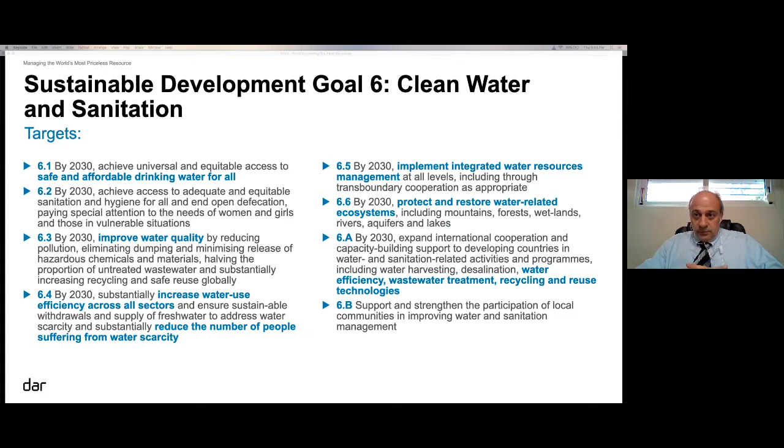Karim, we're starting with you today. So the first target under SDG 6 is providing universal access to safe and affordable drinking water. One of the most critical resources for this goal is groundwater. Tell us a bit about this resource. Why is it so significant, and what are the challenges associated with managing it?

Thank you, Haya. Yes, indeed. As you probably already know, 70% of the surface of the Earth is covered with water. However, most of that water is salt water in the ocean, so that's not usable. In fact, only 2.5% of all water on Earth is fresh water. And from that, about 70% is also frozen in glaciers and ice caps, so it's not immediately usable for communities. This leaves us with groundwater, which constitutes about 30% of all fresh water on Earth, which might not sound like a lot, but it actually serves as the primary freshwater source for upwards of 2 billion people.

So that's why for us as engineers, it's very important to appreciate our role in managing this resource sustainably. For that, there are two main challenges. The first relates to the quantity of the water: the idea is to extract enough water to meet the required demands while not depleting these resources and maintaining them as renewable. The other aspect is in terms of quality, where you don't want any contaminants or pollutants from the surface to deteriorate these resources.

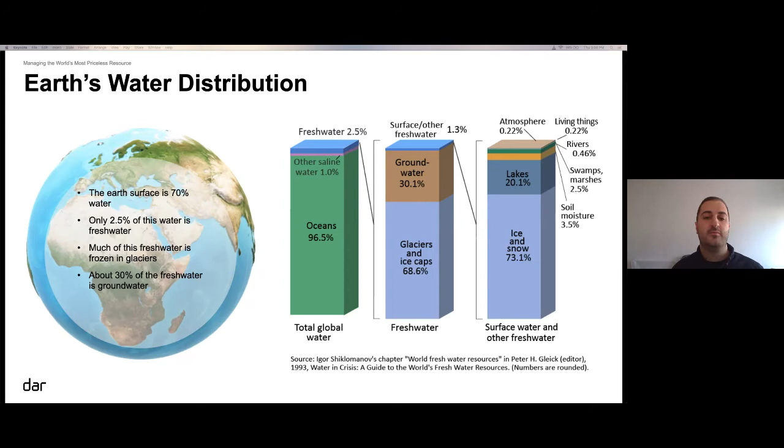This is an exceptionally important problem for us as engineers, particularly in urban areas. For example, if you have excess groundwater abstraction, you might have a dangerous phenomenon known as land subsidence, which is essentially when the surface of the soil settles due to removing too much water from under it. That can lead to flooding, and that can obviously lead to devastating consequences on underground structures and infrastructure, costing up to hundreds of millions of dollars.

On the other hand, some other cities, particularly new cities, can have the opposite problem. Instead of a fall in groundwater levels, you could have a rapid rise in groundwater levels, due to excessive recharge from the surface, which can be due to leakage from utilities, excessive infiltration from irrigation or landscaping at the surface, and in coastal communities, could be due to the influence of seawater level rise. In this situation, the shallow subsurface becomes saturated with water, which can have a negative impact on any infrastructure located underground.

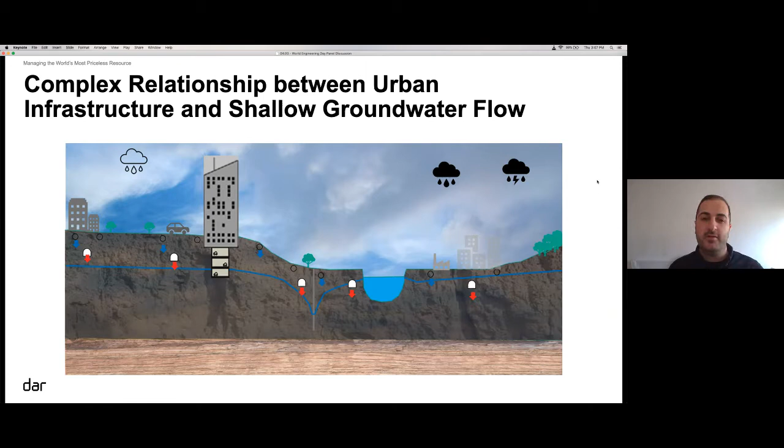So just to illustrate that, I'm going to quickly talk about an example of a city located in the Gulf region. The images on the left show how quickly the city expanded over a period of 30 years. And in recent years, citizens started seeing damage to the roads and infrastructure, and that was all due to the shallow groundwater table.

Even though at the time of construction it wasn't necessarily very shallow, this recharge had an impact on the infrastructure. So our objective here was to design a system to control the water and maintain it at an acceptable level, while at the same time maintaining the city services in operation.

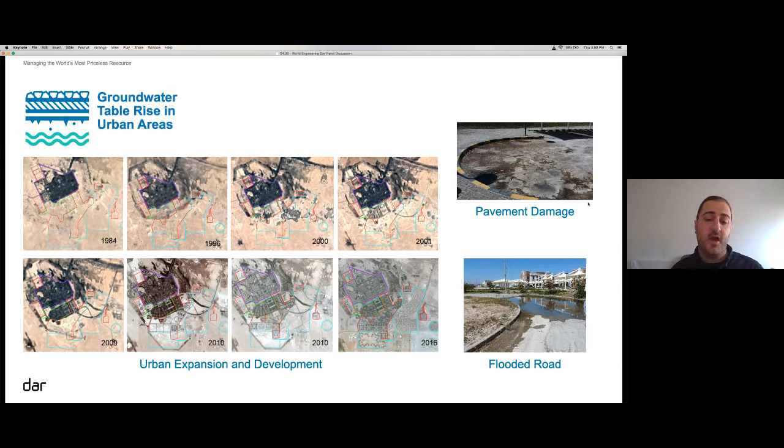So in order for us as engineers to come up with the optimal solution, what we need most is data, and not just general data. What we need is local, site-specific data that we can import into a groundwater flow model or numerical model. This data is used to calibrate the model to mimic the actual conditions on site, and then we can make projections.

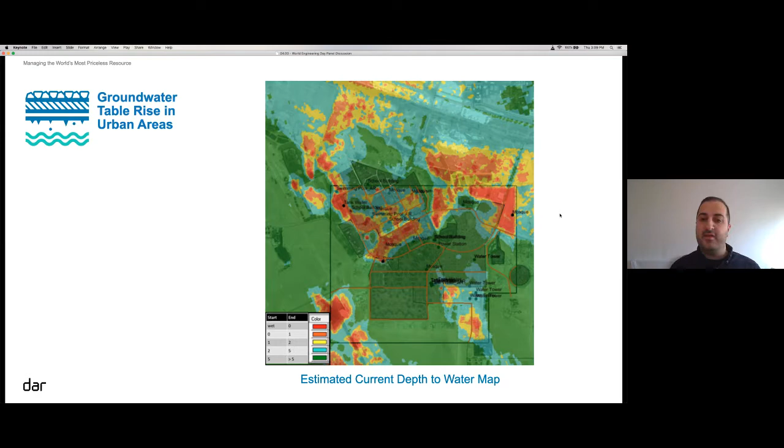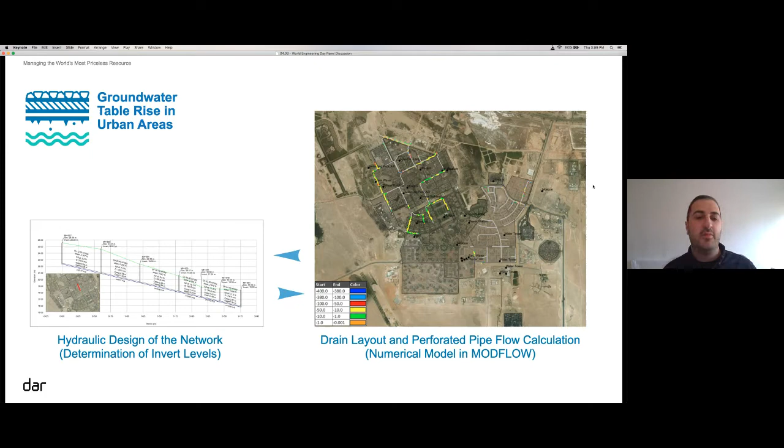So having identified these critical areas, our solution for this problem was to implement a subsurface drainage system. That is essentially a network of perforated pipes placed under the roads that collect the water and effectively lower the water table to acceptable levels, while not really disturbing what's happening at the surface.

The next slide shows just quickly the results of this simulation. After implementing the subsurface drainage system, as you can see, the critical residential areas have had their groundwater lowered.

So having said all this, the question that remains is, what do we do with all this water? You might think that this water extracted from these systems is not significant or doesn't have good enough quality. However, in our experience, we've come to believe that every drop of water that can be used should be used, particularly in cities that have high water demand.

So the idea here, to improve the sustainability of the city, is that this water, which was found to have good enough quality and a large enough volume, will be used for landscaping and other municipal uses across the city. So it was important to us to turn that problem into a benefit.

Excellent. So you protect the infrastructure and you also are able to reuse the water sustainably.

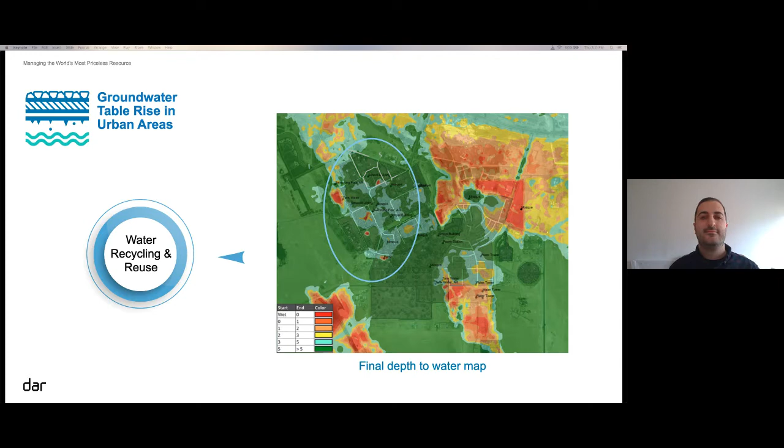Yes, exactly. Karim, another important aspect of SDG 6 is to make sure communities have access to the drinking water resources they need. You also mentioned you were working in very dry regions, and this is very important in such areas because they suffer a lot from water stress. Sometimes to deliver water to such communities, you as an engineer need to try unconventional approaches. So when we began preparing for this panel, you mentioned one project in particular that was quite ambitious. Describe this project for us.

Yes, indeed. This project is what is known as an aquifer storage and recovery system, which, as the name implies, is a system for storing water essentially underground and then retrieving it whenever it is needed.

So for this project, excess desalinated water from city operations was introduced into an aquifer located essentially in the middle of the desert, a few kilometers away from the city.

And the idea or the challenge for us here was to design an optimum operation scheme between infiltration and recovery, in order to ensure that the water introduced into the aquifer is not lost into its depths, and at the same time, whenever needed, it can be retrieved easily from the recovery wells constructed in the aquifer and pumped directly back to the city.

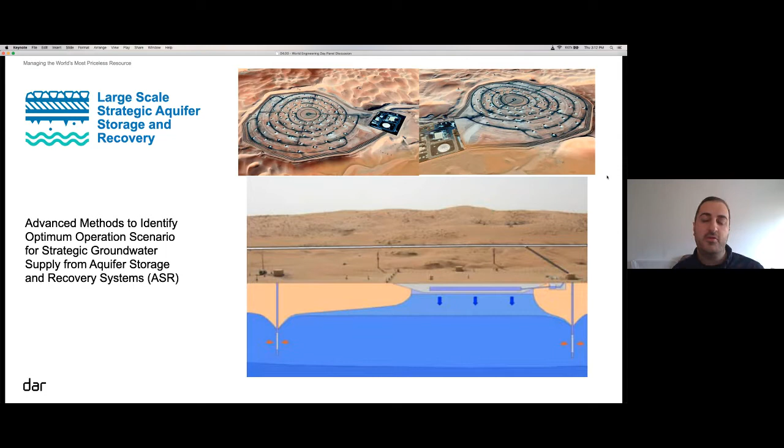So again, what we needed the most to simulate this model and come up with the optimal solution was data, local data. On the next slide, you can see some examples of the data that was collected. We were lucky to have a lot of data for this project.

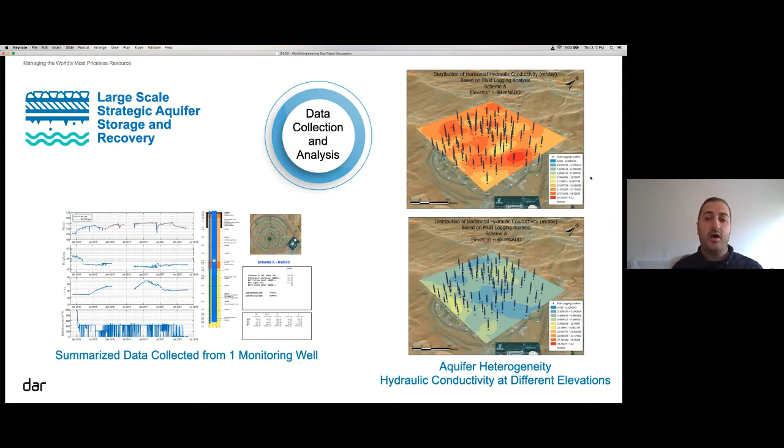All of this data was introduced into a groundwater flow model. Especially the problem here was particularly complex because not only do you have to model the flow of water, but you also have to model the interaction between the fresh water that is introduced and the salt water that is already in the aquifer.

So from the creation of this model, we can create a number of forecast scenarios that tell us what would happen under different recharge scenarios, different infiltration scenarios.

So this was just one example of how us as engineers have a responsibility, or a big role, in promoting the resilience of cities and promoting the sustainability of cities and their readiness in the face of emergencies.

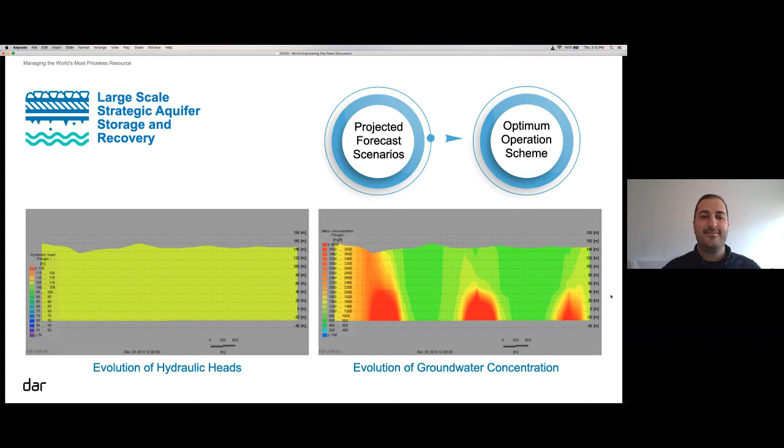Okay, so as Karim has demonstrated, managing groundwater is essential in empowering communities to meet their water needs. But just as important is what happens on the surface.

So our next speaker, Mr. Scott Smith, is an expert in water resource management, especially as related to water efficiency, water harvesting, and recycling and reuse technologies. Scott, you work on both small-scale projects, such as buildings, and also on master plans for entire cities and developments, sometimes within very specific restrictions and regulations. So tell us about your experience.

Thank you, Haya. Yes, if you could go to the next slide, please.

All projects need an understanding of the water, sewage, and stormwater constraints for projects and sites in the Middle East and worldwide. In my opinion, the main engineering challenges we face in terms of water and sanitation is to establish water budgets for our projects and master plans, that is potable water, gray water, treated sewage effluent, and sewage. We need to understand these inputs and outflows to better create the design.

The determination of the amount of available water from all sources coming into and out of the project boundaries is key to a good design. This ensures that designers understand the water limitations and needs of the site and adjust their designs accordingly. It also assures that water efficiency measures, like low flow toilets, water efficient fittings, water efficient irrigation, gray water systems, etc., that are put in place are justified and relevant to the design.

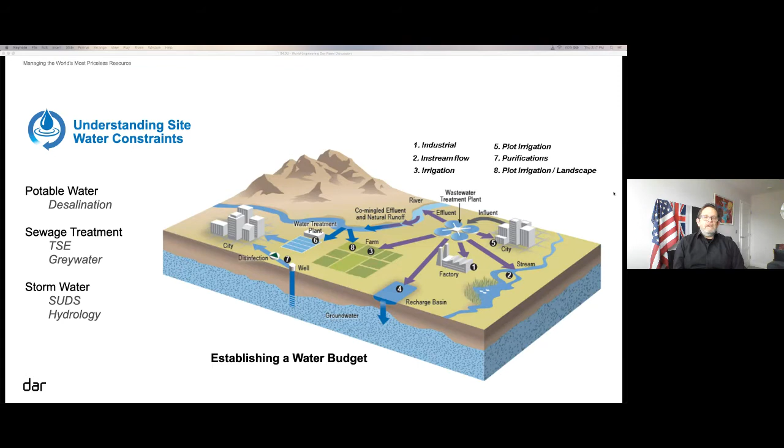Looking closer at the urban site water constraints, potable water and sewage is usually provided by the municipality or utility providers. The problems associated with obtaining the water and treating the sewage are for a kind of others to solve. But unfortunately, as cities mature and become more urbanized, more and more utility providers are imposing constraints and conditions in urban settings on how buildings and projects can connect into their services.

In terms of stormwater constraints, which with climate change and the increased frequency of major storm events in the world, most sustainable urban drainage system solutions will not work based on the space constraints in the urban environment and practical issues associated with the site. There is usually no room for swales, wetland features, ponds, etc., with most site area covered in hardscape and impervious areas, which makes storm events and handling the rainwater more important.

Therefore, for the determination of urban water budgets, this requires establishing design principles around how to connect into services, inputs and outputs, which lead to gray water and rainwater harvesting and stormwater management solutions. Next slide, Haya.

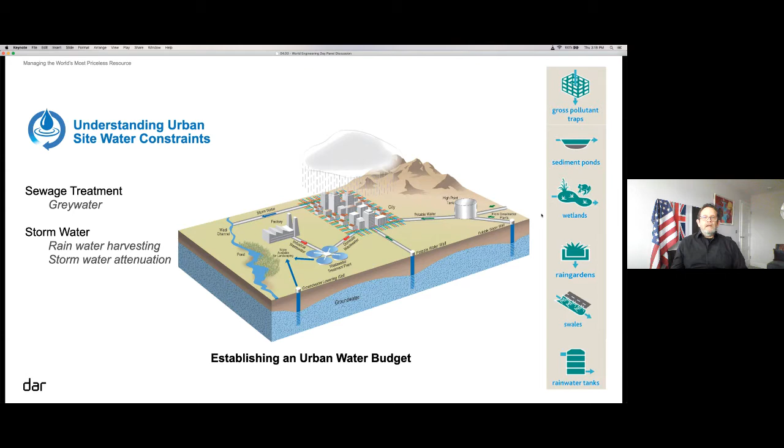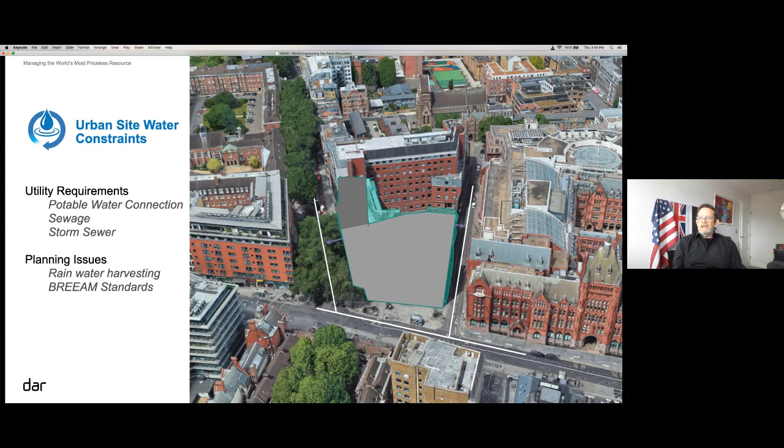This is our new building, the Dar Group new headquarters in London at 150 Holborn, which is currently under construction. In established urban sites like 150 Holborn, water utilities set the typical size of water connections and meter constraints for the total amount of potable water that can be provided to the site.

Sewage outflow needs to be established without exceeding the amount already connected from the existing building. For 150 Holborn, the utility company mandated that the stormwater peak outflow needs to be reduced below 50% of the expected 1 in 100 year storm event from the previous building on the site,

if we're going to connect rainwater into their sewer system. In addition, the planning authority, under whose control this building falls, required that the design provide rainwater and greywater harvesting systems, and that 60% of the available credits in the UK Sustainable Certification, BREEAM, which is a requirement for planning, need to be achieved before construction takes place.

So we had to show in our design that we would be meeting 60% of the water credits on the sustainable certification. The sustainability group in London, which I am a part of, made great efforts to ensure that water efficiency is at the heart of our new European headquarters building in London. We ensured that the constraints in terms of reduction in potable water consumption, sewage outflow, and stormwater attenuation imposed by the site and local utility providers are met through a combined greywater rainwater harvesting system that works in combination with the building's stormwater attenuation system.

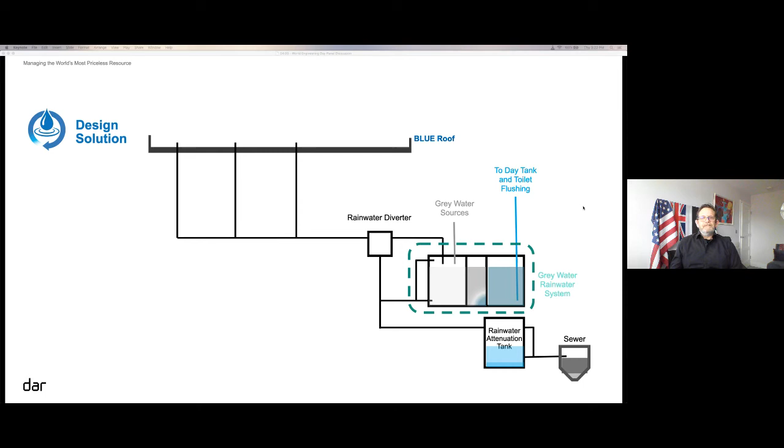In the UK, if the Met Office issues a flood warning or weather alert for the London area, the smart building technology detects this alert and configures the building to be prepared for the event. This is done by opening the valves in the intake tank on the greywater rainwater harvesting system and the rainwater attenuation tank to ensure that they are both empty.

The rainwater diverter valve is then set to allow rainwater to empty into the rainwater greywater harvesting tank. In the first instance, the blue roof is allowed to fill up, capturing the first 50 millimeters, or 2 inches, of rainwater, which then slowly drains from the roof at an established rate at the gullies.

If more rain falls that exceeds the 50 millimeter level over the time the roof is allowed to drain, this rainwater overflows into the rainwater downpipes and into the building's rainwater system. In turn, the rainwater and greywater harvesting tank is then filled.

Once the rainwater greywater harvesting tank reaches capacity, the rainwater diverter valve switches to allow rainwater to fill the rainwater attenuation tank. If the rain event exceeds all this capacity, it is then allowed to discharge into the sewer. This system is designed to store over 50% of the rainwater precipitating onto the site in a 100-year storm event, based on the existing building that was previously on the site.

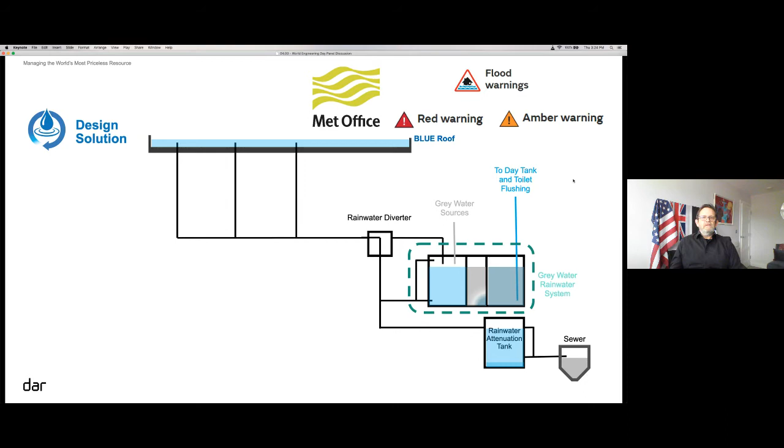Next slide, please. This building, designed and installed into our new building, has allowed the design aspects of the building to meet the highest sustainable certification standards of LEED Platinum and BREEAM Outstanding, which are the highest certification levels we can achieve.

This also allowed us to achieve all the water credits for both certification systems. For LEED, we got 11 out of 11 credits, and for BREEAM, we got 9 out of 9 water credits. Next slide.

This same problem can apply to other urban areas of the world, and in the Middle East due to climate change impacts. Obviously, other cities besides London will have differing levels and complexities associated with water and sanitation, and may not need to utilize the engineering solutions we have put in place for 150 Holborn.

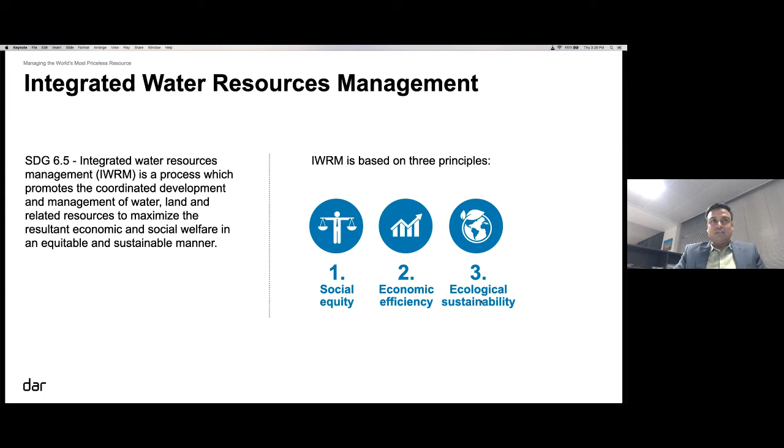Haya, can you please go to the next slide? So what are the challenges we face in integrated water resources management, planning, and design? Mostly we face four challenges.

The first one is unavailability of topographical information or ground information. This information is required to develop the understanding of contributing catchments in a particular region to estimate discharges.

The second is historical rainfall data. This is used to get information about rainfall patterns in the region and to estimate the water storage volume in the area.

The third one is existing groundwater levels. Generally, we don't get this information in developing countries. If we can get it, it provides the condition of water exploitation, how much water has been exploited. In case the water is at shallower depth, as mentioned by Karim, in urban cities we need to know this information to design the concrete structures.

And the fourth one is gauged river discharges. This information provides valuable data about historical flow rates of any river or catchment, and also provides a relation of the flow rate with catchment parameters such as runoff and rainfall.

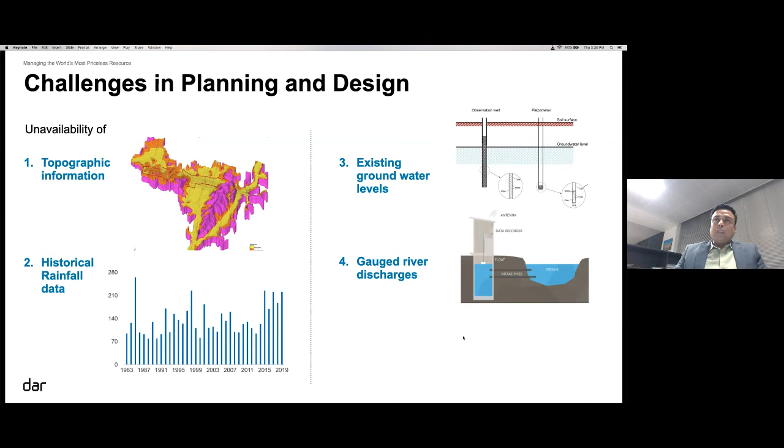So what are the solutions that can be adopted to overcome these challenges? The first challenge we discussed was unavailability of topographical information. In that case, we can explore SRTM data which is available.

What is SRTM data? SRTM data is Shuttle Radar Topographic Mission data that provides a digital elevation model of 30 meter spatial resolution, and it can be used in ArcGIS platform to prepare catchment and stream delineation of an area. It also provides contour levels.

The second challenge we discussed was absence of historical rainfall data. This can be overcome by using TRMM data, which is satellite data. The full form of TRMM is Tropical Rainfall Measuring Mission, and this provides short-term historical rainfall data from year 1998. It provides rainfall data with reasonable accuracy, giving the engineer a general idea about the rainfall pattern in the area of interest.

The third challenge we discussed was about existing groundwater level. In absence of existing groundwater level information, we can visit the site, find out the existing water wells, and measure the water levels in those wells to get information about the current condition of groundwater level.

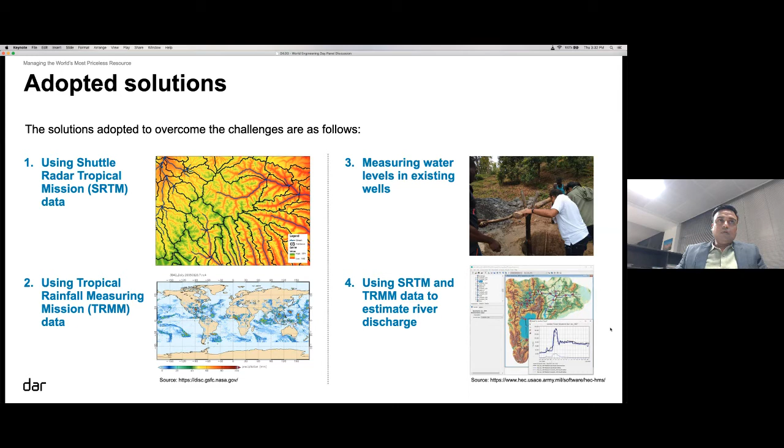These solutions generally we adopt in projects where data is not available.

Now I'm going to present a case study where all the previously mentioned solutions are adopted, whether it is use of SRTM data in absence of topographical information, TRMM data for rainfall pattern, or measurement of groundwater in existing wells. This case study is from an African city where the existing water supply source is only groundwater, and it was overexploited.

In addition, the city has witnessed rapid urbanization over the past two decades, which has aggravated the situation. Due to depletion of the groundwater table, farming in the region has been adversely impacted as the cost of water extraction has risen a lot. In some locations, the wells were running dry and there was no water anymore.

So what happened after that? The city administration decided to improve the current water supply system in the city and selected DAR to propose a suitable solution that could serve three main purposes: first, rehabilitation of the water supply system; second, replenishing the groundwater table; and third, providing adequate irrigation water to the farmlands.

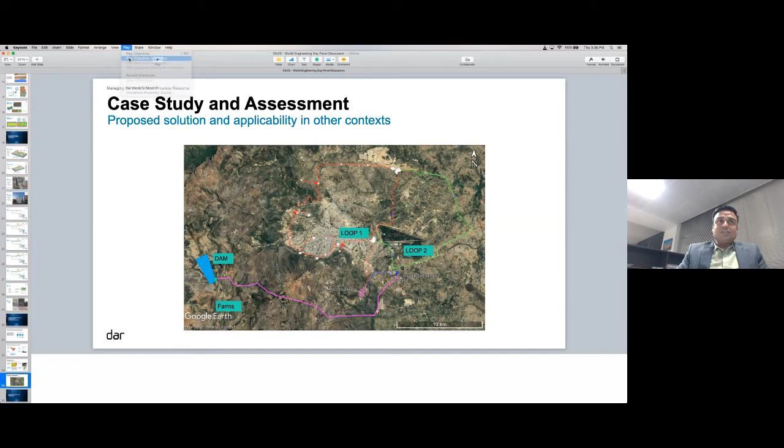So regarding applicability in other developing countries: I believe nowadays developing countries are finding themselves in a state where current water use practices are leading to water deficit and are not able to cope with new challenges such as population growth, rapid urbanization, changes in rainfall pattern due to climate change, and increased water demand in the agriculture and industrial sectors due to rapid growth. We are witnessing this in India quite a lot nowadays.

All these aforementioned issues can be addressed by an integrated water resources management process, which can help developing countries focus more on economic and social growth without compromising the sustainability of the environment. Thank you.

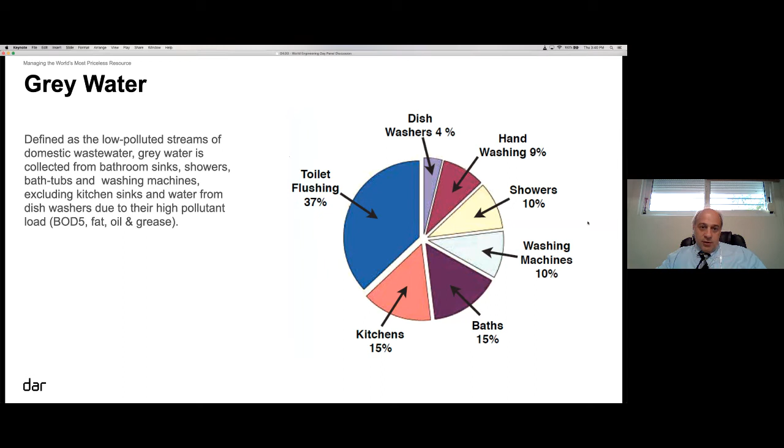As we can see from the process flow diagram, the process includes flocculation, sedimentation, ultrafiltration membranes, known as UF membranes, and the treated water is stored in a balancing tank. From the balancing tank, it's pumped into the building's toilet flushing network and the irrigation network.

The plant produces 150 cubic meters of grey water. The losses of 20 cubic meters per day are due to backwashing of the UF membranes and the waste sludge which is disposed. The treatment of grey water can, as we said, be used for toilet flushing and irrigation purposes, and in this way we can reduce our freshwater demand by at least 40%.

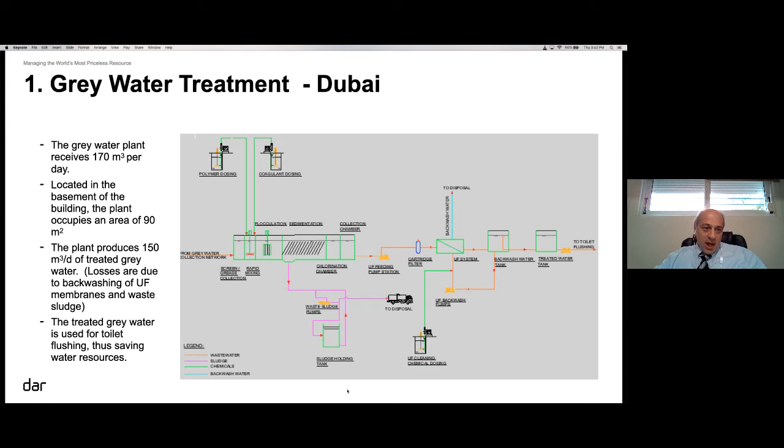The biological treatment includes nitrogen and phosphorus removal, so that at periods of low irrigation demand, the treated wastewater can be safely disposed into the sea.

The waste sludge is anaerobically digested so that we can produce heat and power from the biogas released from the process, which is sufficient to run the digestion process on its own.

Now, the digested sludge is further dewatered and mixed with wood chips to produce compost for agriculture. Therefore, we can see that this plant is a very good example of sustainability, since everything is reused, nothing is wasted or dumped. All the wastewater comes in, is treated and is used for irrigation, and the waste sludge is made into compost and used for agriculture.

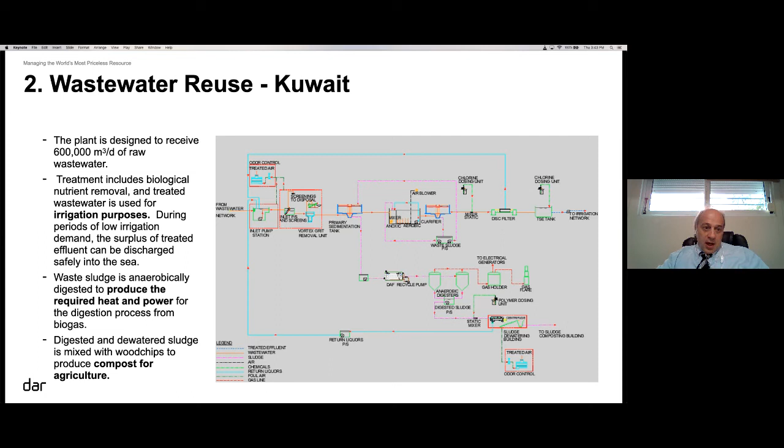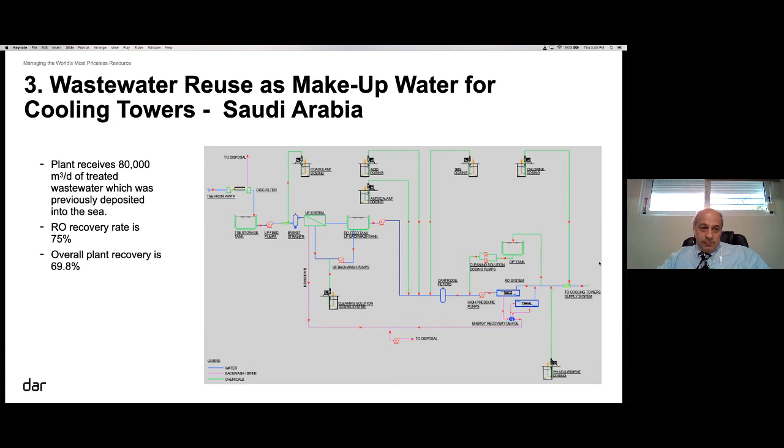The plant produces 60,000 cubic meters of makeup water, which is used in the airport cooling plant. So in this way, we can save 60,000 cubic meters of fresh water.

Now, as we can see from the examples given, different treatment processes have to be used depending on the final use of water, keeping in mind that the ultimate goal is to minimize the potable water demand through environmentally friendly, sustainable solutions. Thank you.

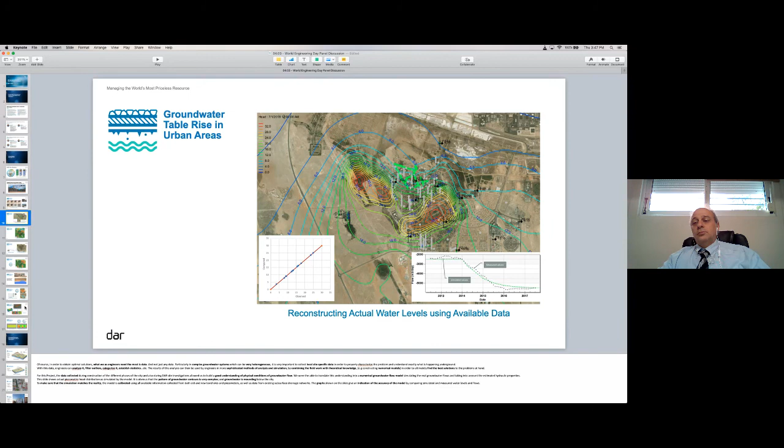Hydrogeological systems or groundwater systems are very complex and very heterogeneous. So as I mentioned earlier, you do need site-specific data because no two systems are the same. You need water levels, you need measurements of hydraulic conductivity measured through pumping tests. You can have a measure of concentration if the issue is fresh water versus salt water. The more data that you have, the better it is.

As Naveen was talking about the importance of data as well, it's very important for us as engineers from different trades or disciplines to share this data together, so we can incorporate it and come up with an optimal solution. It's important to help each other. And then you also asked me about the process for design.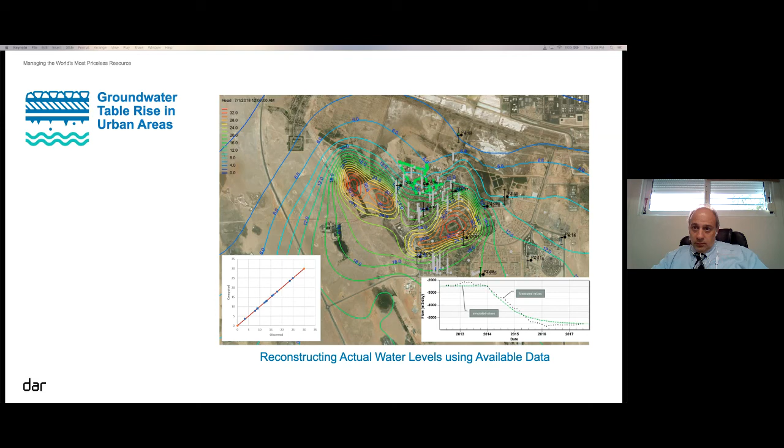So Karim, can I ask you something? There is another question, which is how do you know that your model is working? How do you confirm that this model works? Because you mentioned creating a model for this, so how do you know that it actually represents the correct conditions?

Yes. So as I said, all this data, when you create this groundwater flow model or groundwater mass transport model, you need to calibrate it based on all of this data that you collected. Actually what you see on the screen now, the graphs on the bottom left and bottom right give an indication of the accuracy of the model.

They compare, for example, the graph on the right compares measured values versus simulated values. And when these two curves match, that means your model has a high level of accuracy. Then you can use it to simulate scenarios, to integrate it into your design, or do whatever you need to do with it.

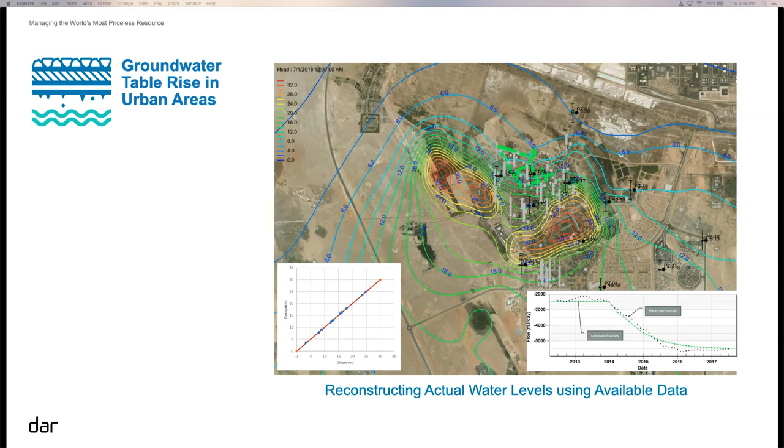So you test it against the data, you mean? Yes, you do test it against the data, and then you use that in the designs. I think the next slide has... if you can switch to the next slide, please. Oh, yes, sure. This one? Or the one afterwards.

Yes. So all of this data basically comes down to software. The design for this subsurface drainage system was an iterative process between multiple types of software. On the left, you have network design with conventional software for wet utility network design. On the right, you see how the invert levels and the layout of the pipes is introduced into the groundwater flow model, and the groundwater flow model gives you the flows that go into these pipes, and it gives you an indication of the impact of these drains after they are introduced.

So here I think there's a very big opportunity for us as engineers to integrate, especially with all this new technology, this new software that comes up.

There's a very big opportunity for us as engineers to combine all our knowledge together, be it understanding the site constraints mentioned by Scott, sharing our data as mentioned by Naveen, or finding a reuse for wastewater instead of disposing of it improperly, as mentioned by Marcos. So I think there's a great opportunity there looking ahead at the future.

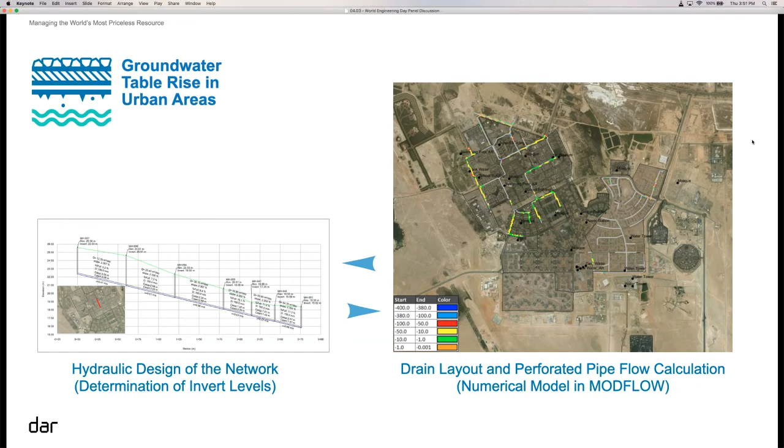Perfect, thank you Karim. We have one more question for you from Tony. He asks, did you use the variable density flow model to simulate freshwater injection? I'm assuming that's referring to the aquifer storage and recovery system. Yes, obviously, that would be on the next slide.

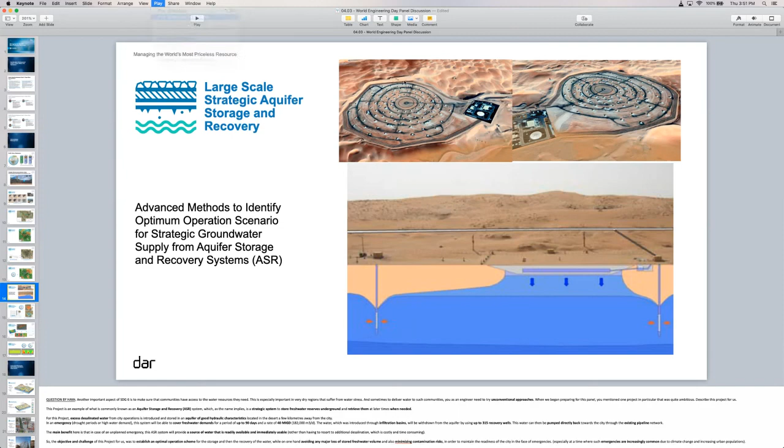Just to give an indication on slide 16: the freshwater here was introduced into a saline aquifer that basically acted as a container. This model, as Tony mentioned, allows you to import it into a finite element model. Because saltwater and freshwater intermix and chemical processes occur, it's important to import all of these parameters from the tests done on site and the data collected there. It's necessary to use it because you don't want the fresh water to mix with the salt water and become unusable, or go into the depth of the aquifer and become unusable. There's already a huge loss of water, but innovation is always moving forward to come up with new ideas.

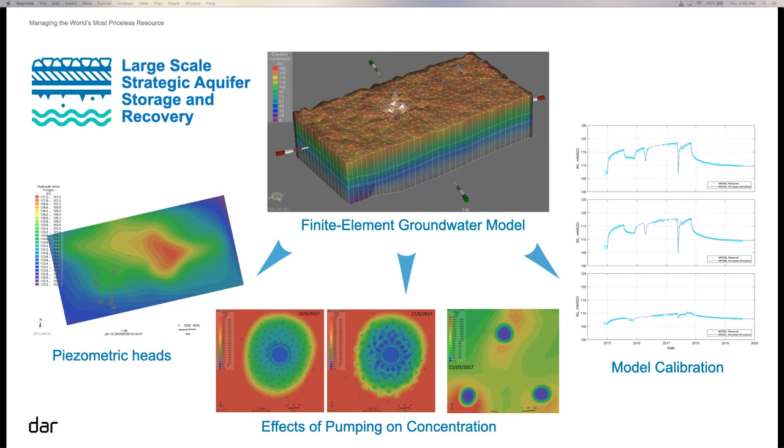There was one other part of Tony's question - he also asked, was the density of the existing groundwater mapped? Yes, obviously it was mapped based on a lot of data collected over the years since the start of construction of the project, upwards of 10 years ago. We had recovery wells installed near the 3 infiltration basins, but also data from the environmental agency of that country. We had to map that data, digitize it in GIS, and combine all the data from third-party wells and additional wells located not only within the boundary of the model but also outside of it, to interpolate and determine the conditions of the model, its boundary condition, the stresses acting on it, and so on and so forth.

Thank you very much, Karim. I actually also have a question for Scott.

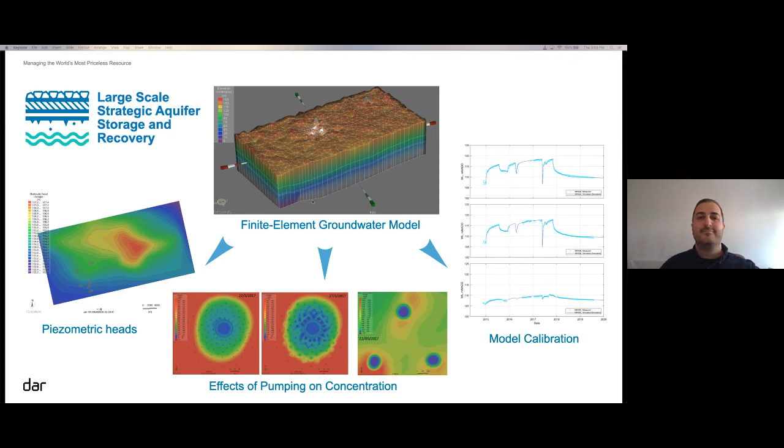Yes, you're up here. The question we received was about smart technologies. You mentioned that smart technologies are what control the greywater system and the rainwater harvesting system. The question we got was, what other smart technologies are used for this process?

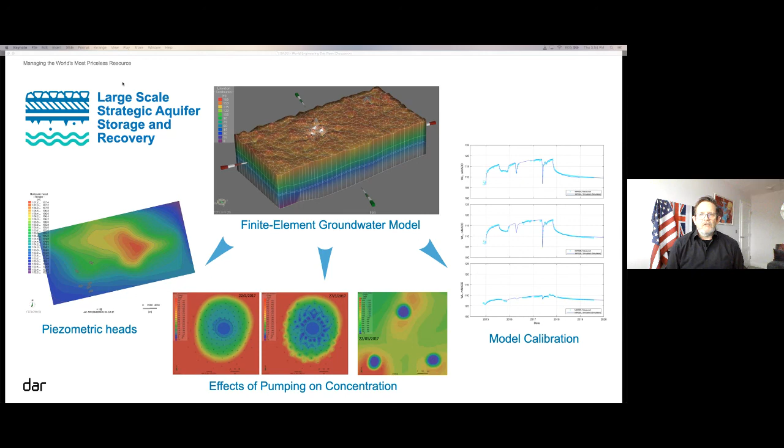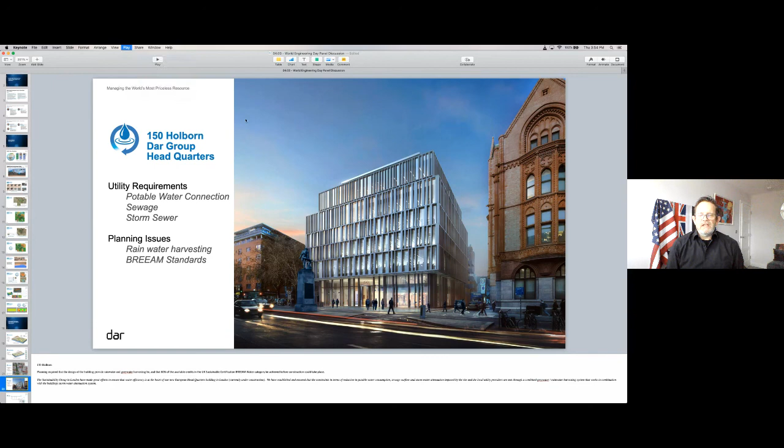Yes, for 150 Holborn, we've created a smart technologies backbone for the building. In terms of water, there's a lot of metering that goes on, so we're able through the meters and smart technology to understand where the water is flowing throughout the building, including tank levels and when it's being discharged. We also have smart taps and fittings as part of the Internet of Things, which allows us to understand what's going on in terms of water efficiency techniques. So in theory, our building will be quite at the forefront of smart building technology systems.